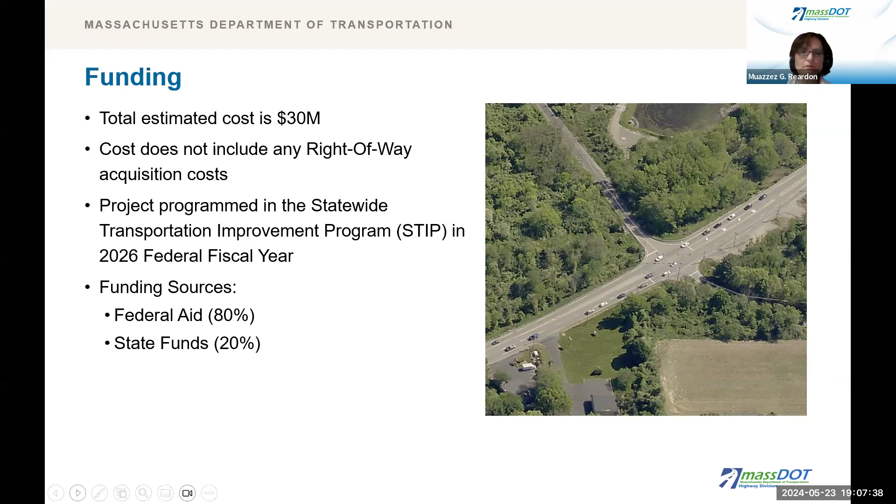We will be introducing the project, provide some history, what we are trying to accomplish, and provide information on the design. At the end, we will review our next steps and also have time for comments and questions.

The project is located on Route 20 in Shrewsbury and stretches 1 mile from the Green Street, South Street intersection to the Valente Drive intersection. For purposes of defining the existing and proposed roadway configuration, the project is split into 2 portions, the eastern portion and the western portion, divided by the wetland area near the middle of the project. The western half of Route 20 consists of 1 eastbound travel lane and 2 westbound travel lanes. The eastern half consists of 2 travel lanes in each direction.

In addition to evaluating the corridor, 6 major intersections were evaluated for improvements.

Previous to this project, MassDOT and the town prepared a master plan for transportation improvements to address existing issues and support economic development of the Route 20 corridor within Shrewsbury. In March 2020, the final public meeting was conducted for the master plan. The preferred concepts derived from public meetings showed support for shared use paths, sidewalks, and turning lanes to improve safety and congestion issues.

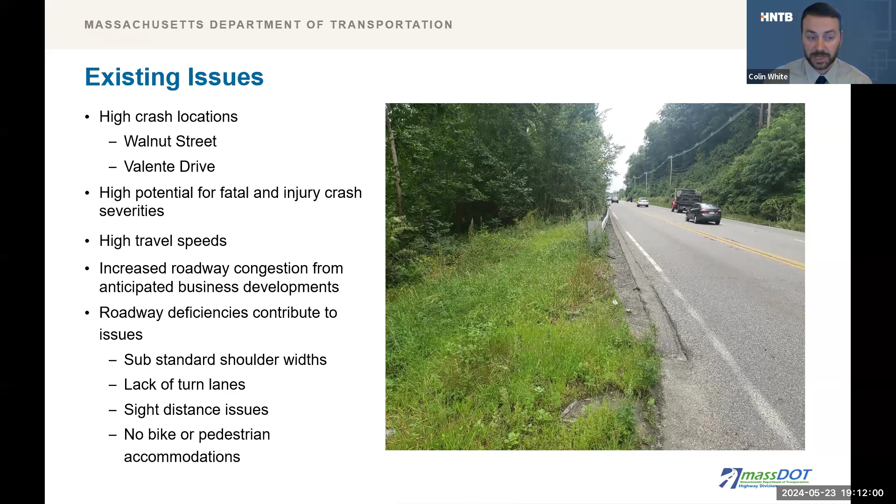MassDOT and HNTB took a close look at the crash history of the project area. In the western portion, many of the crashes were due to general congestion, left-turning vehicles onto Route 20, and the traffic signal at the South Street and Green Street intersection. However, it was found that most of the crashes in the eastern portion involved a vehicle turning left, either into or out of a side street or driveway. In fact, almost 3/4 of the crashes involved a left-turning vehicle.

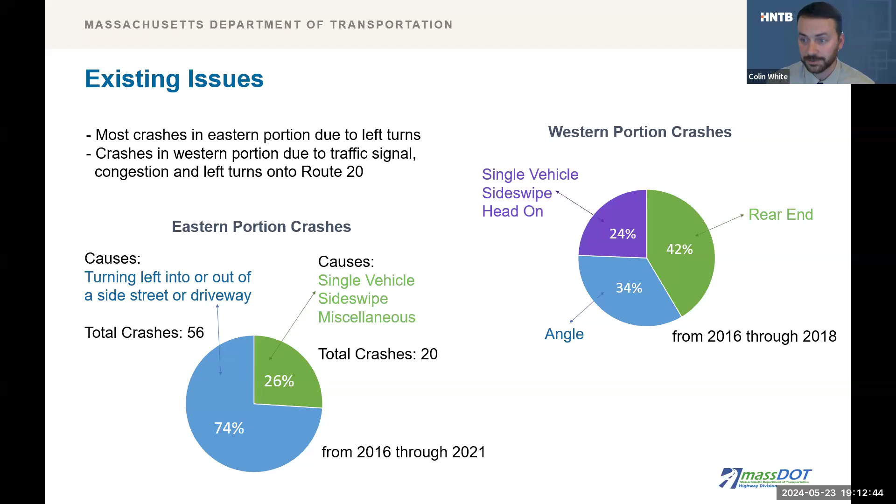So, what do we want to accomplish given these existing issues and roadway deficiencies? The purpose of this project is to improve traffic safety for all road users, including non-motorists, along Route 20 from the Green Street, South Street intersection to the Valente Drive intersection, to reduce high travel speeds, to accommodate future traffic conditions with respect to planned developments, and to improve congestion issues within the project area.

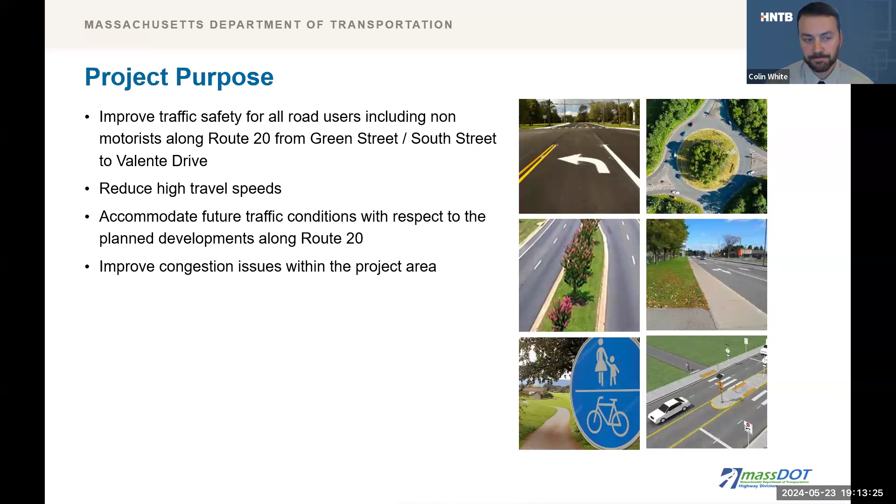Now I can get into some of the alternatives that were considered when we were starting to think about the design for this corridor. But before that, I'd like to show the existing cross sections along the roadway.

Here you can see in the western portion at the top, there's 3 lanes, one travel lane eastbound and 2 travel lanes westbound. There's also a traffic signal at the South Street and Green Street intersection. And then in the eastern portion, on the bottom of your screen, there's 4 lanes, 2 eastbound and 2 westbound.

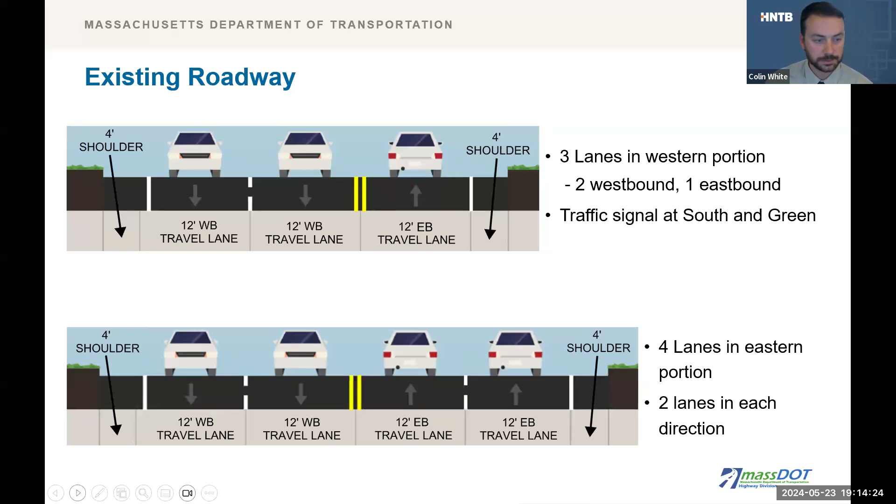This slide shows the existing control at each intersection. The South Street and Green Street intersection is signalized. On the bottom left, the South Street East intersection is not signalized, and left turns out are prohibited, so it's right out only. The Walnut Street intersections are slightly offset and both not signalized. On the bottom right, the Valente Drive intersection is not signalized, and both left turn and through movements out of Valente Drive are prohibited.

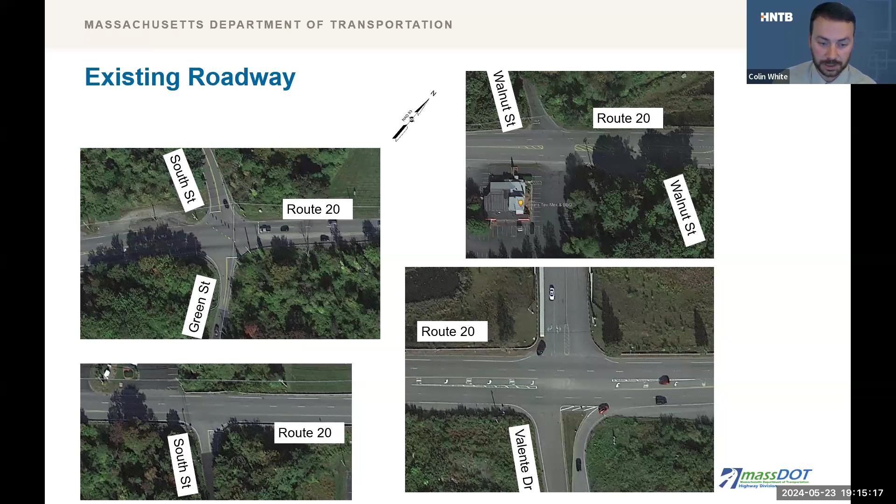So, alternative 1. This is a preferred alternative from the Shrewsbury Master Plan study, with some minor adjustments to the cross-section dimensions to meet the current MassDOT standards. This alternative provides a shared use path for pedestrians and cyclists on the south side of the road and a sidewalk for pedestrians on the north side.

The western portion of the project includes the addition of a second eastbound travel lane, dedicated left turn lanes at select intersections, and the existing traffic signal at the South Street and Green Street intersection is improved, with a new traffic signal proposed at the Valente Drive intersection. On the eastern portion, a two-way left turn lane is provided for this alternative.

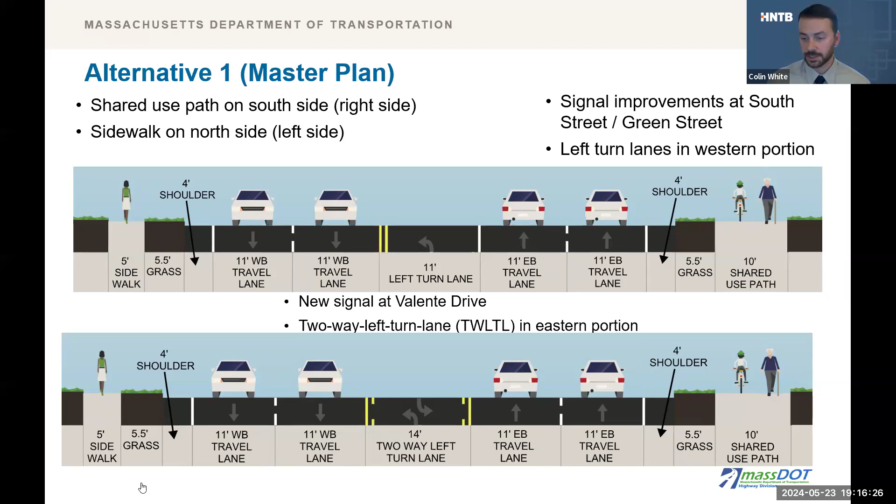Alternative 2 builds off of the master plan alternative. As in alternative one, there's a shared use path for pedestrians and cyclists on the south side and a sidewalk for pedestrians on the north side. Also similar to alternative one, signal improvements and additional turning lanes would be provided at South Street, Green Street, and South Street East would remain right out only.

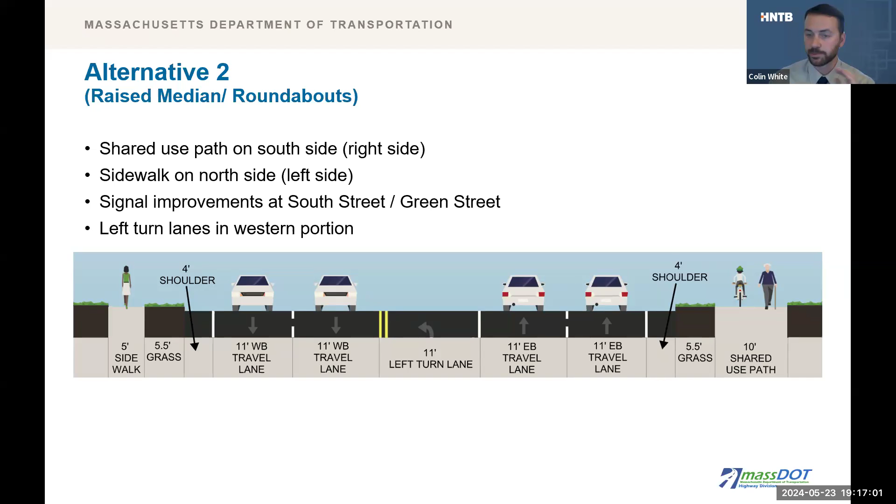However, alternative two proposes a roundabout at the Valente Drive intersection instead of a traffic signal, and a second roundabout is proposed near the middle of the corridor. Instead of a two-way left turn lane in the eastern portion, a raised median is proposed between the two roundabouts. This is the main difference between alternatives 1 and 2.

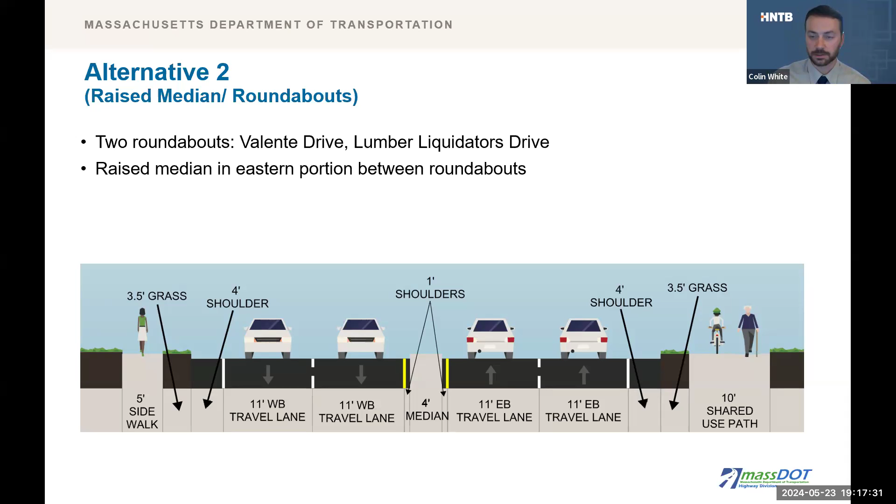So what's the preferred alternative? The preferred alternative is alternative 2. MassDOT selected alternative 2 as the preferred alternative based on several factors, including safety, the ability to address the purpose of the project, and environmental considerations.

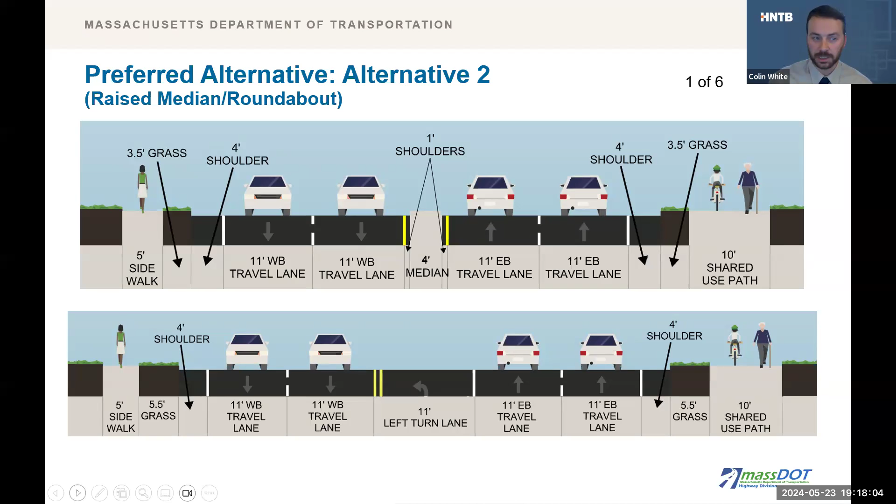Now we can take a closer look at the proposed improvements for the different areas within the project. So we can start at the western end of the project. This is Green Street and South Street.

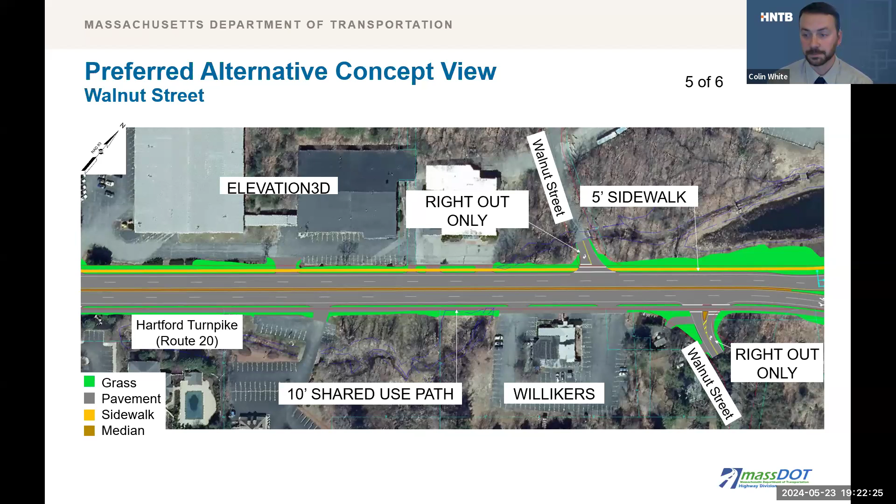So this preferred alternative has several benefits. Unlike traffic signals, roundabouts can be combined with raised medians to better manage access along the corridor. The existing crashes associated with left turns into and out of driveways and side streets are addressed with this. It was mentioned earlier that managing speeds was also part of the project. Roundabouts include deflection that requires vehicles to slow down to 25 to 30 miles an hour, regardless of the time of day.

Both alternatives improve accommodations for pedestrians and cyclists, but the addition of the roundabout in the middle of the project provides an additional safe location for pedestrians and cyclists to cross Route 20. This preferred alternative provides a significant reduction in the number of crashes.

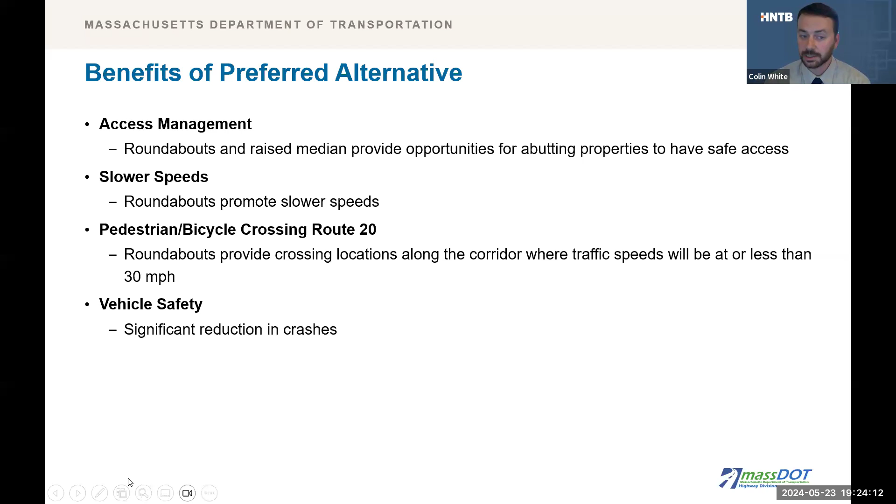So the predicted reduction in crashes for this preferred alternative. As part of this alternative analysis, we prepared a safety analysis, which is done to compare the impacts of design decisions on the number of crashes that may occur in the future. The chart on the left side of the screen compares the existing roadway configuration to Alternative 1, the master plan, in green, and Alternative 2 with the roundabouts for the eastern portion of the project, in blue.

The chart shows a 70% reduction in total crashes in this area for the roundabouts alternative, but more specifically, an 85% reduction in the types of crashes that result in injury or fatalities. The safety analysis of the signal improvements at the South Street and Green Street intersection, shown on the right of your screen, showed a reduction of 15% in total crashes and 30% in crashes that result in fatalities or injuries.

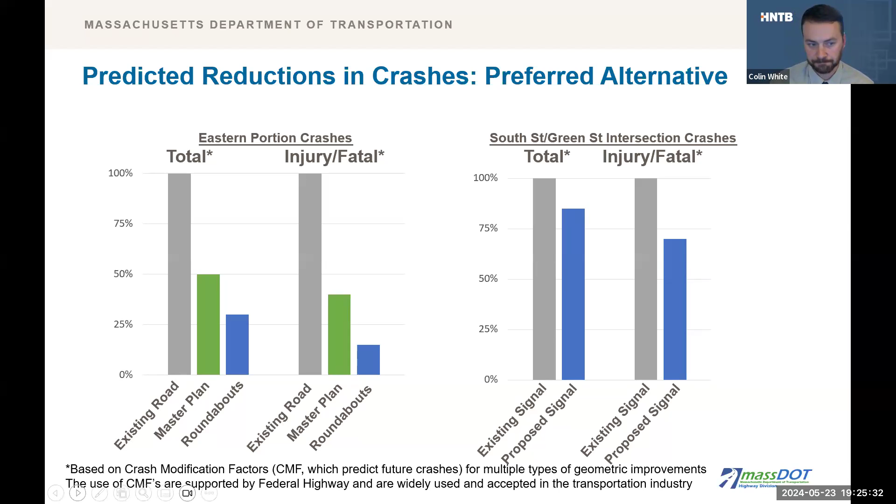So, how will your property be impacted? Now I would like to turn the presentation over to Michael Ruderman, representing MassDOT's Right-of-Way Bureau, to discuss the right-of-way process.

Thank you very much, Colin. My name is Michael Ruderman. I am a member of MassDOT's Right-of-Way section. The Right-of-Way Bureau is charged with acquiring all of the rights, whether they are temporary or permanent, private and public land, for the design, construction, and implementation of this project. We are governed by state and federal provisions that instruct us in the proper way of going about this.

Primarily, they are about notice, about how we must present the project to any owners whose property will be affected. Affected property owners' rights are protected under our state constitution, Mass General Laws, Chapter 79. As this project does receive federal funding, there are federal protections as well, under Title III of the Real Property Acts of 1970. The current design does say that there could be takings, whether permanent or temporary, on private property abutting this project.

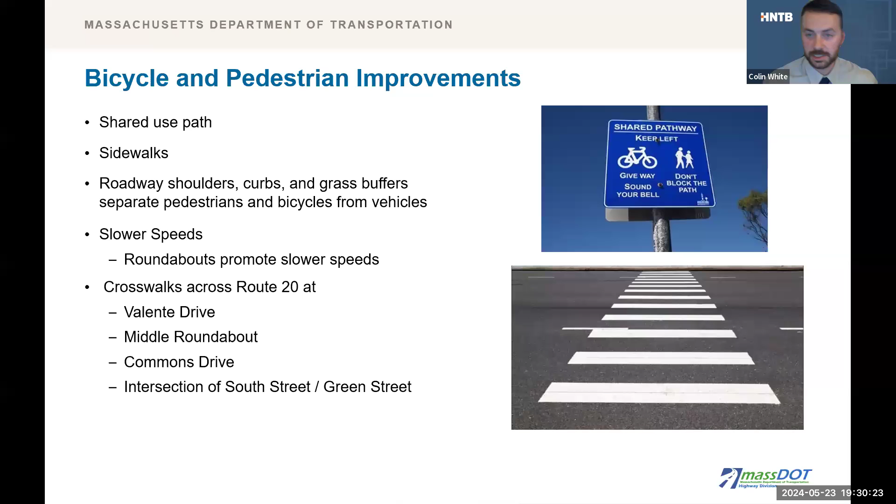So, environmental impacts. I will now give the presentation back to Moises to discuss environmental permitting and finish our presentation. Thank you, Michael and Colin.

Measures to avoid, minimize, and mitigate environmental impacts during project construction will be implemented. As the project advances, any impacts that are identified will be reviewed by the appropriate agencies. The town and its residents will be notified and engaged throughout the entire permitting process.

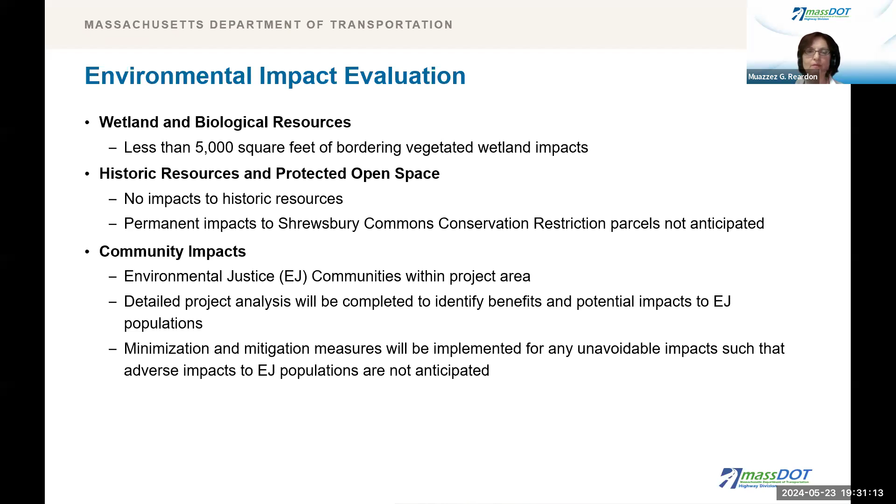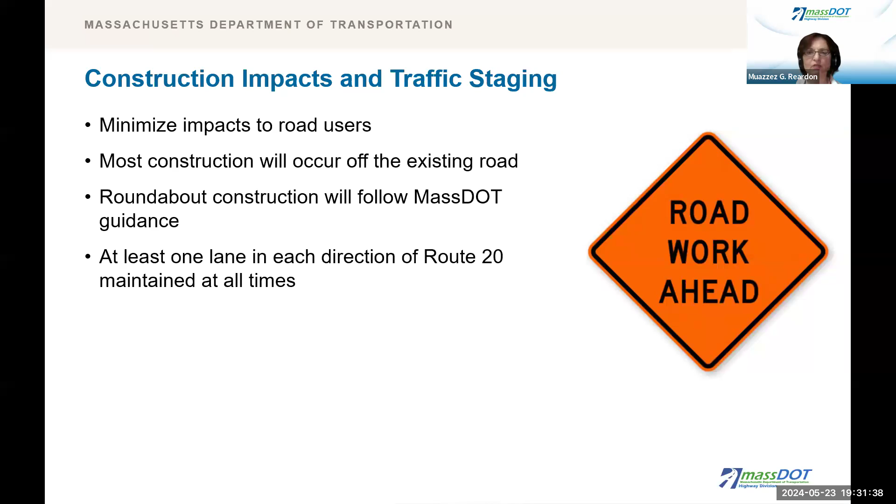What is the construction approach? Access will be maintained during construction. There will be lane closures and traffic shifts. Bicyclists and pedestrians will continue to have access to the roadway during construction. If necessary, roadway closures and detours will be limited to short durations.

After this design public hearing, we will work on the next design submission, which we refer to as the 75% submission. This will be submitted later this summer. The design is expected to be advertised and bid in 2026.

Your feedback is very important to the success of the project. In addition to this meeting, we encourage you to reach out to us with written comments. Emailing us at the address shown on the screen is preferred: MassDOT project management at dot.state.ma.us. We encourage you to do this within 10 business days of this presentation, so your comments can be incorporated into the design where feasible. Please be sure to include the project number 610825 in the subject line of your email.

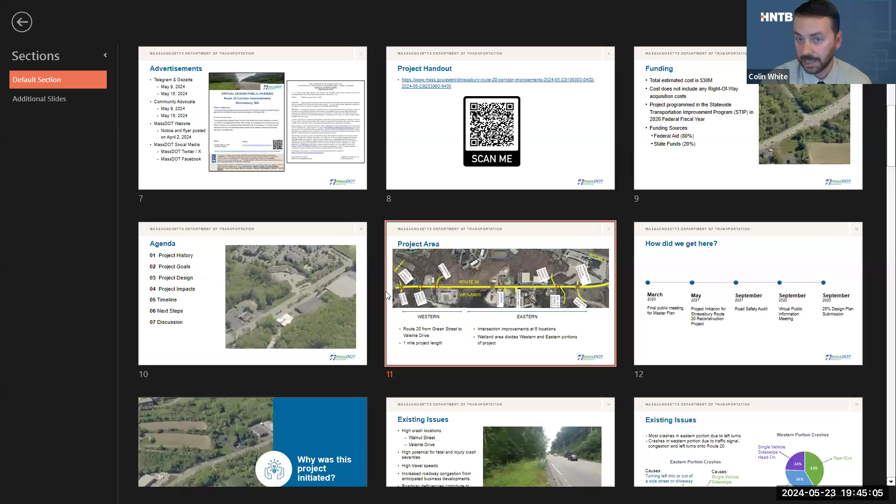Yeah, I can start us off again. Yes, we definitely simulated traffic in the roundabouts. In fact, we took traffic counts which include classifications, so we know what types of vehicles are there, the truck percentage, and applied that to our analysis. So all those trucks are included in the operations of these roundabouts. One thing about roundabouts versus traffic signals is, unless there's someone in the roundabout, you don't actually have to stop, so we see that as a benefit to trucks sometimes — they can keep rolling through versus signals.

Will double tractor trailers be any issue with the rotaries also? One thing about these specific roundabouts is that they're two-lane along Route 20, which gives more space for trailers when trucks are turning. And then, just in terms of the snowbanks, I don't think it'll be an issue, but maybe maintenance or someone else from MassDOT can speak to that more.

Sure, Colin. I'll mention from the district's perspective, we've built quite a number of multi-lane roundabouts in the last 10 years or so, and our maintenance forces have gotten quite a bit better at dealing with snow removal in roundabouts. Certainly during the middle of an event, there will be some snow within the roundabout, like there is at most of our intersections. But we'd be working with our maintenance forces to make sure that as the storm wraps up, they can push the snow off the roadway within the roundabout itself and clear the apron provided for truck movements as well. So it's not something we'd expect to be an issue, and we'd be working with our maintenance staff during final design to account for snow removal in how we design both roundabouts. Thank you.

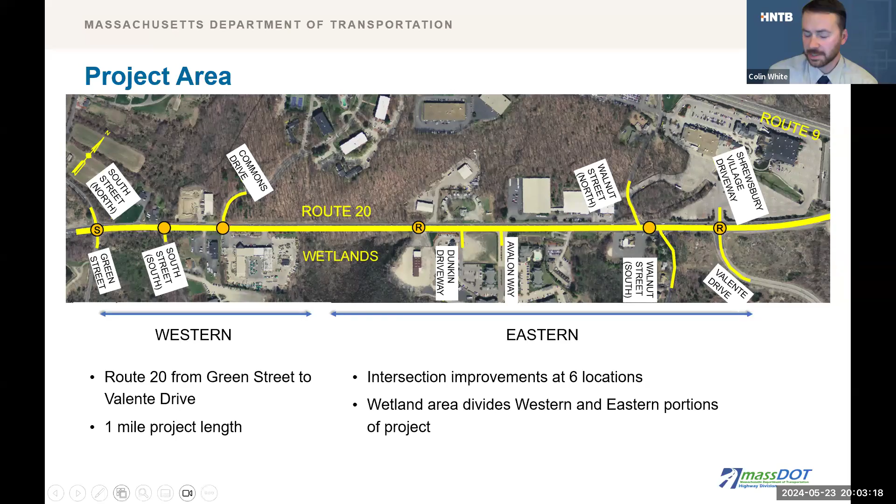If there is a desire for pedestrians to cross, we certainly want them to cross at crosswalks. That is the safer option, especially here with proposing some pedestrian hybrid beacons where they have to stop for a red light. I think the impacts to vehicles driving along Route 20 and the delay might not be that impactful, maybe not as much as you think.

We did not think that it would be too impactful to traffic operations. And then for South Street, if we go to slide 26, we could look at what's proposed there again.

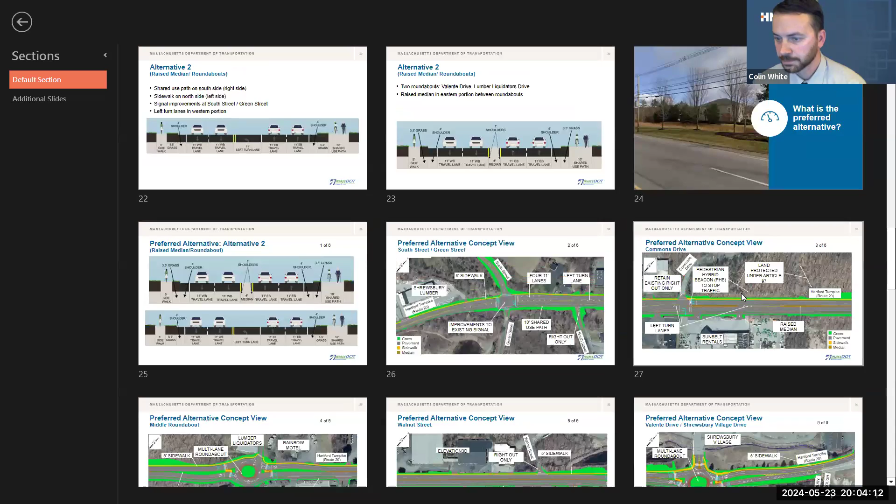Right now we know there's been issues in the past, and I believe that's why the town made that a right out only, even today in current conditions. So we're going to keep that right out only, so that people aren't trying to make a left, but they will be able to go down to the middle roundabout to make a U-turn to then continue west on Route 20. Additionally, going into South Street from the east, there will be a left turn lane where a vehicle can safely wait in its own lane, not the through lane, until it finds an acceptable gap in the traffic and then make its turn.

Thank you, Colin. The next question is from Diana. With the anticipated large warehouse off Centech Boulevard, will there be changes at that intersection, and when might that be?

Thank you, Diana. I think I'll mention again that in terms of improvements at that intersection, it will probably be largely driven by the UPS development that is proposed. So we would anticipate that development would likely require some changes at the intersection. But right now, that is something that MassDOT will be working with the town and the developer to address. So we don't know exactly what kinds of changes that would entail and when those changes would be implemented.

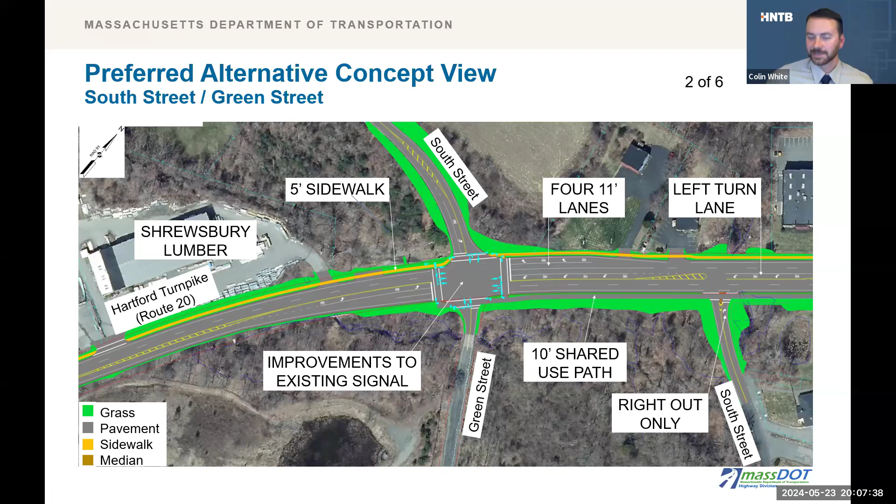Some traffic signal equipment that we install might include some technologies for some of the more advanced vehicles that will give you anticipated traffic signal green lights. I think that's about where we are in terms of technology so far.

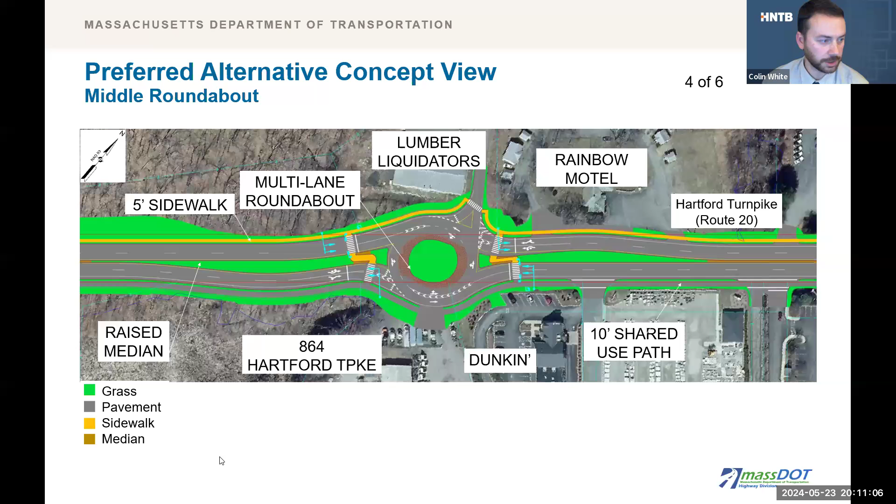Going to slide 30, you can see in the right lane to the right of the roundabout heading eastbound, we are proposing pavement markings that will say Route 9 only. Before the roundabout, heading towards it eastbound, we will have signs to get people into the correct lane even before they reach the roundabout, so that if you want Route 9 you're in the right lane, and if you want to continue on 20 you're in the left lane. This is something we've definitely considered. It's a good point.

The next question is from Diana. Entering Route 20 from Lake Street at the new Market Basket has challenges, especially when school buses are trying to return into their parking area and traffic blocks them from turning left into that bus parking area. Are there any plans to restudy this area now that it is developed?

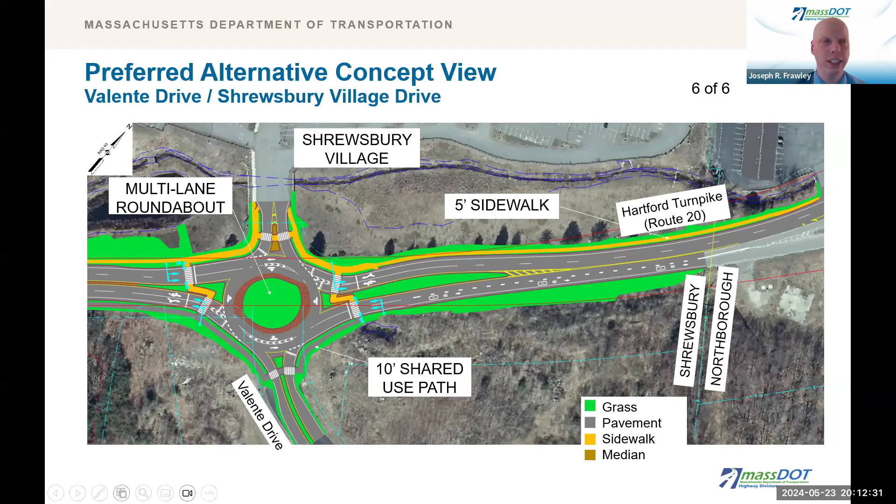Thank you, Diana. There aren't really plans to restudy the area at Route 20 and Lake Street, but if there are adjustments to traffic signal timing needed since the development has happened—now that we have real traffic instead of projected traffic—that's something the district office would tend to do. We can certainly take a look at that location and see what kind of timing improvements we can make to help things work more efficiently there.

Thank you. The next question is from Cindy: will there also be a left turn lane into Commons Drive?

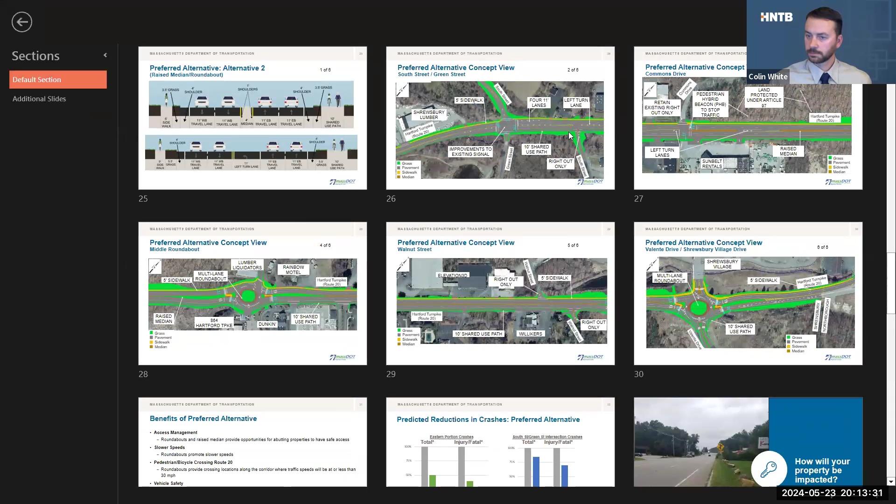Yes, there will. If you go to slide 27, you can point it out. Commons Drive is at the top there, and you can see a left turn lane on the left side for vehicles wanting to turn into Commons Drive. This is also where the crosswalk will be located.

Thank you. And then the final question from John: what is peak traffic on Route 20 in vehicles per hour, and what's the expected rotary throughput in vehicles per hour? Thank you, John.

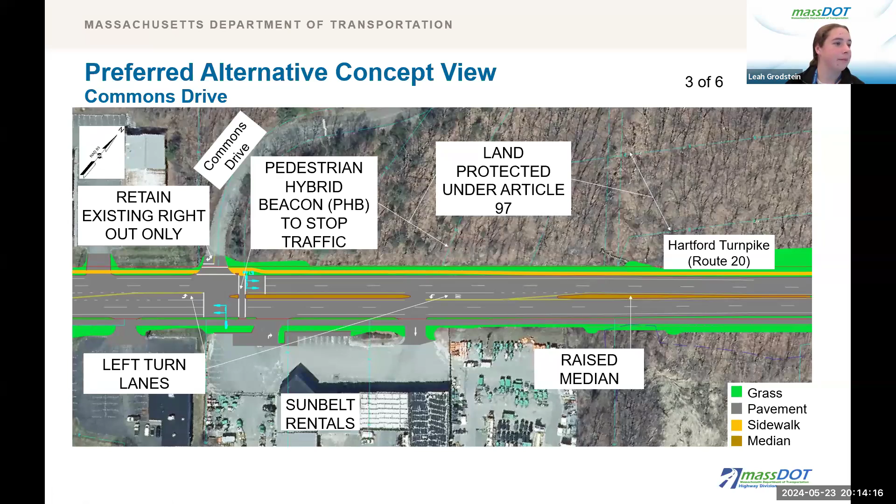These are very good questions that I don't have off the top of my head. Average daily traffic, we were looking at future volumes of maybe like 24,000 a day on Route 20. Peak hour, I'm trying to remember, might be around 2,000—but those aren't exact numbers, just generally. As for the roundabout throughput, our analysis showed that they would be able to operate well with minimal queuing at the roundabouts. The exact throughput, I'm not sure of that number.

I don't know if it makes sense to go back to the slide with the email, just to remind people that they can follow up via email with some of these really technical questions—they're sometimes hard to recite data on the spot here. Right, you took the word out of my mouth, actually.